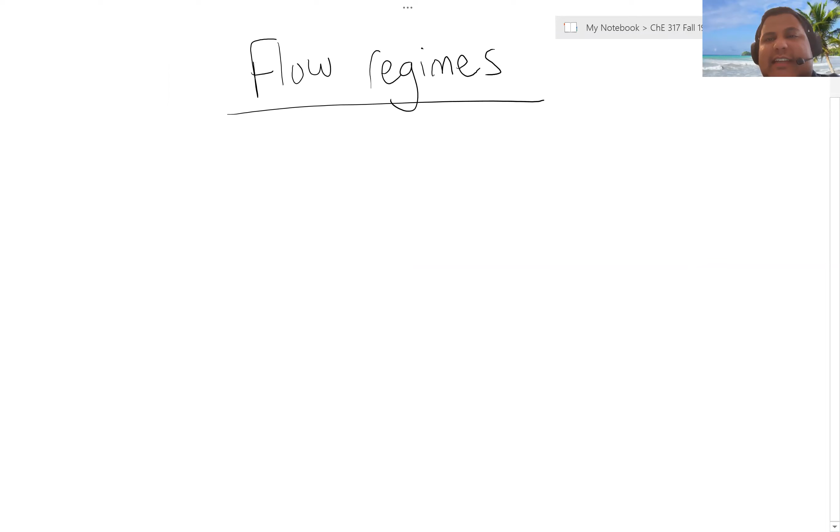Today, we're going to discuss topics associated with flow regimes and how the flow regime you operate under relates to turbulence and shear stress. When we're looking at flow regimes, we're looking at one of three categories, which describes, in general, the nature of the flow and how it relates to shear stress and, by extension, frictional dissipation. These regimes are laminar flow, transitional flow, and turbulent flow.

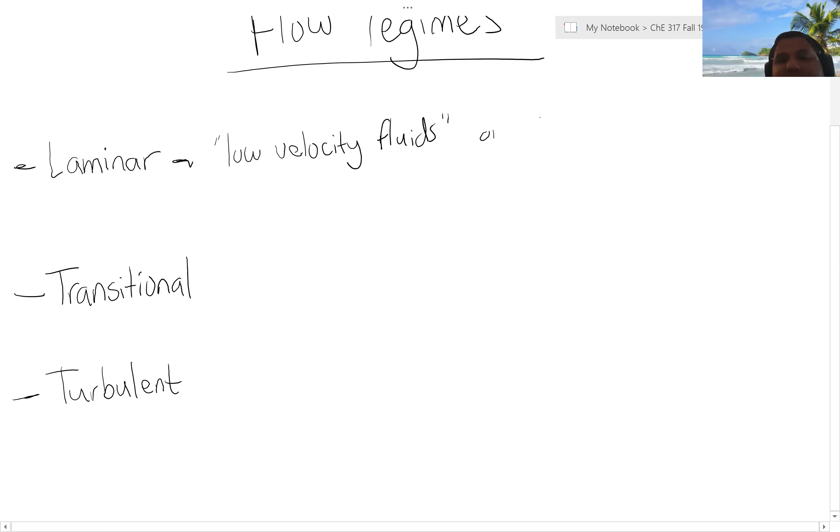When we're looking at laminar flow, we consider this flow regime for what's considered low velocity fluids, or fluids that can be considered highly viscous, with no lateral mixing. We can consider the fluid layers, i.e. the streamlines, exist independently.

You don't have to wear your mask. I don't think so. Not when you're sitting down.

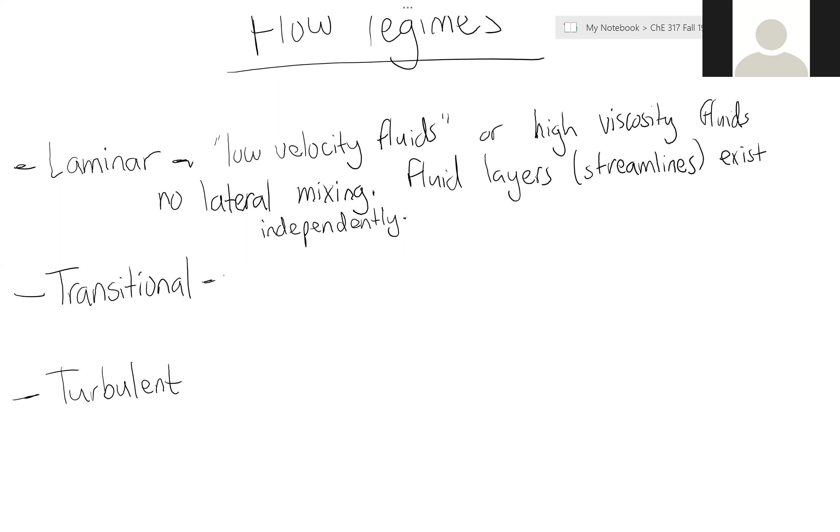And so when the velocity starts to increase, we start getting into a transitional flow regime where we start to see the presence of flow irregularities.

You'll get used to it. I mean, this is your day one by yourself, so. Guys, whoever is not mute, can you mute yourselves? I muted them, don't worry.

So we start to see the presence of flow irregularities, eddies, which results in slight lateral mixing of streamlines.

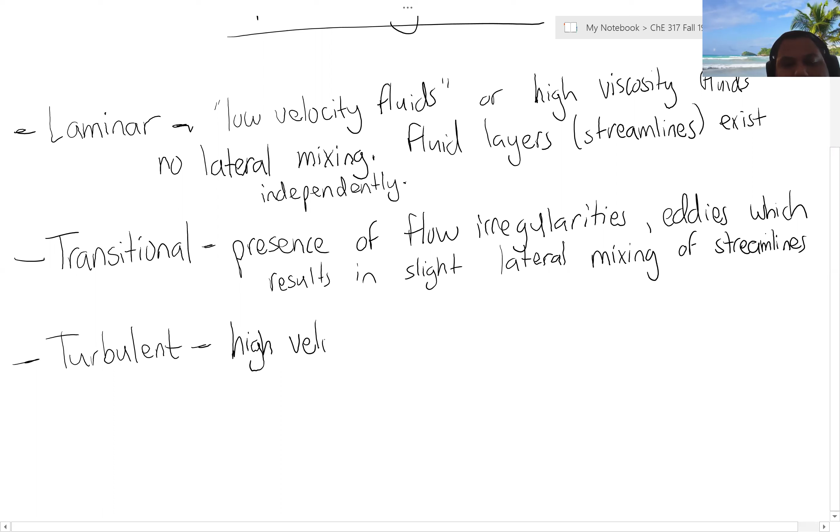And finally, we have turbulent flow, which we categorize as high velocity flow, and a big important thing to discuss here is that shear stress becomes a function of density and independent of fluid viscosity.

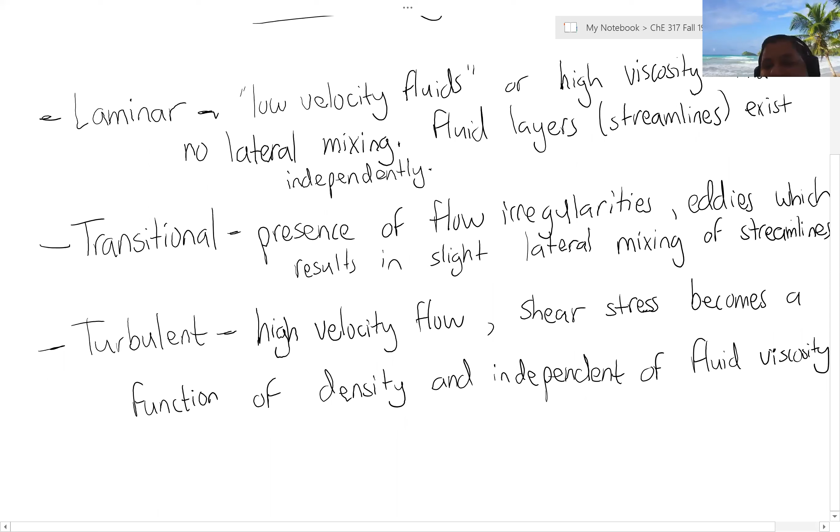So we have these three regimes going from low velocity to high velocity. We start in a laminar regime, then we encounter a transitional flow regime, and finally a turbulent flow regime. One other important thing to note in terms of laminar flow is that shear stress is a function of viscosity, and it's independent of fluid density. So that's a big delineation: as we compare and contrast laminar and turbulent flow, the shear stress becomes dependent on flow viscosity, independent of density. Then as we get into a turbulent regime, the dependence on viscosity drops away and the fluid density becomes an important parameter of the flow.

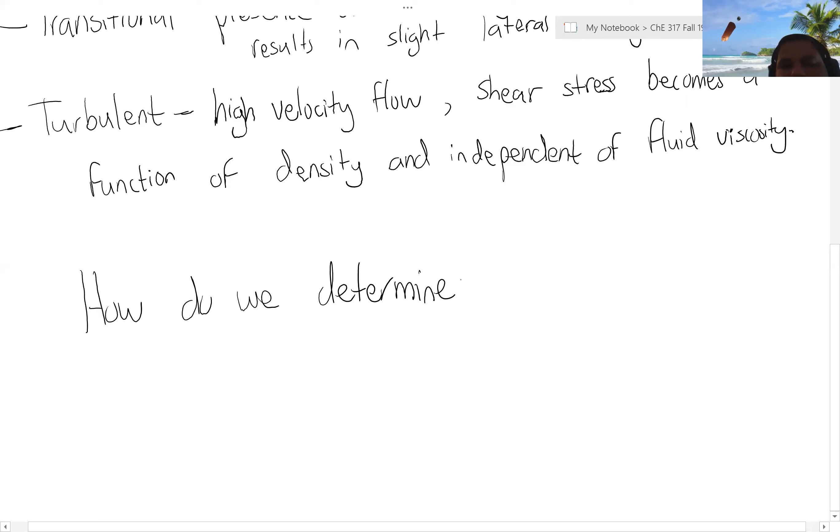So the next question then becomes, how do we characterize, or better word is determine, our current flow regime? So does anyone have any ideas on how we identify the current flow regime of operation?

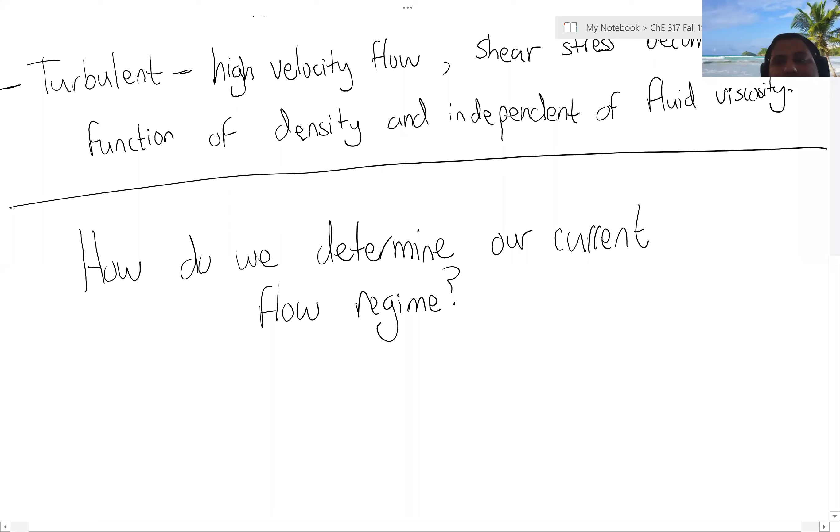You could take the Reynolds number of it. Okay, we can calculate a Reynolds number. There are a lot of ways we can define Reynolds. If we want to define it in terms of words, it's a ratio of flow convective forces over a fluid's viscous forces. So when viscosity is important relative to convection or flow, we have low Reynolds numbers, and as the convective forces begin to dominate and viscous forces become less important, we get into high Reynolds numbers.

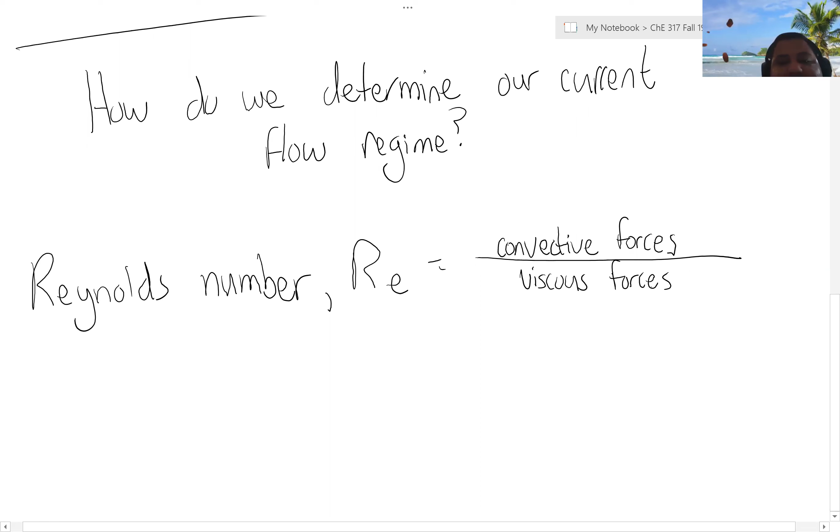So we can calculate it mathematically in one of several ways. The most common is fluid density times the fluid velocity, which I'll note by U, times the flow diameter dimension, which is the pipe diameter, over the fluid's absolute viscosity, mu. I can also write it as a function of fluid velocity times the pipe diameter over the kinematic viscosity, denoted by kappa. And I can also define it as a function of the pipe diameter times a term called G over absolute viscosity, where G is equal to the fluid density times the fluid velocity, known as a mass velocity.

And G becomes extremely important when we're talking about gases. So a lot of times when we're looking at gas and vapor flow and we want to calculate Reynolds number, this third way is how we do it.

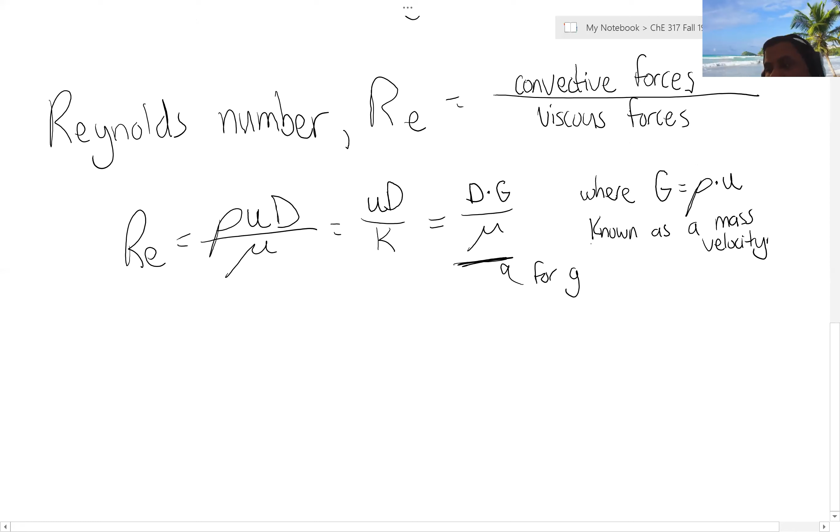So once we can calculate the Reynolds number, once we know it, we can categorize our flow regime based off of a series of values for laminar, transitional, and turbulent flow.

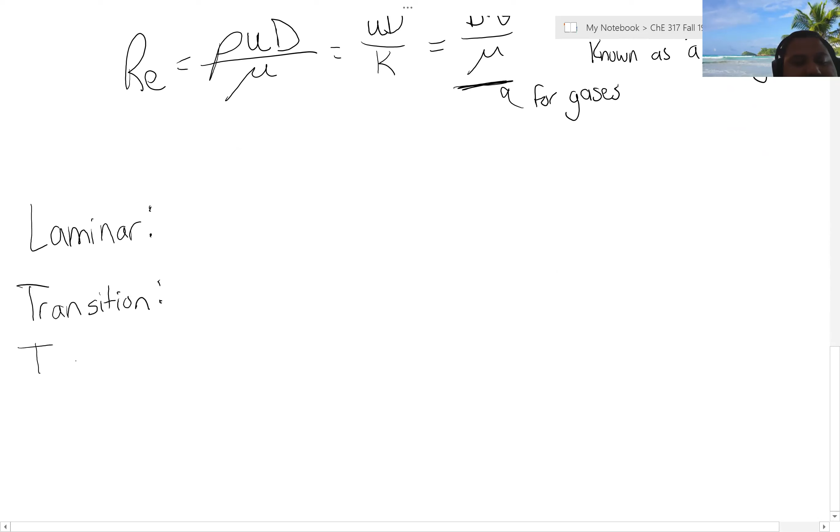So I saw in the chat a question about the third formula — when is it useful? This DG over mu is extremely useful for gases. We'll talk about why that's important in a little while. But if you're calculating Reynolds number for gases, you're more often than not going to use this third form of the calculation.

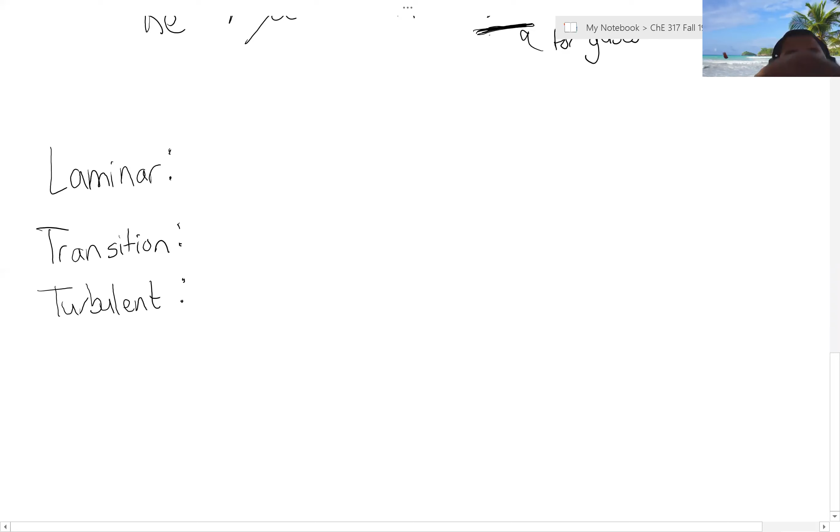So jumping back to laminar, transitional, and turbulent flow: we consider fluid to be in the laminar regime when the Reynolds number is below or equal to 2000. We consider the flow to be transitional when it's between 2000 and 4000. And we consider fluid flow to be turbulent when the Reynolds number is greater than 4000. Keeping in mind that these windows are approximations.

And they're not set in stone. So these values I give you are engineering ballparks so that you can make reasonable assumptions based on the data that you have.

So in terms of illustrating the nature of these flow regimes, I've got a good video that describes it pretty well, so I'll go ahead and share it with you all. I don't think we need the sound for it though. Hopefully you guys can see this video as it starts.

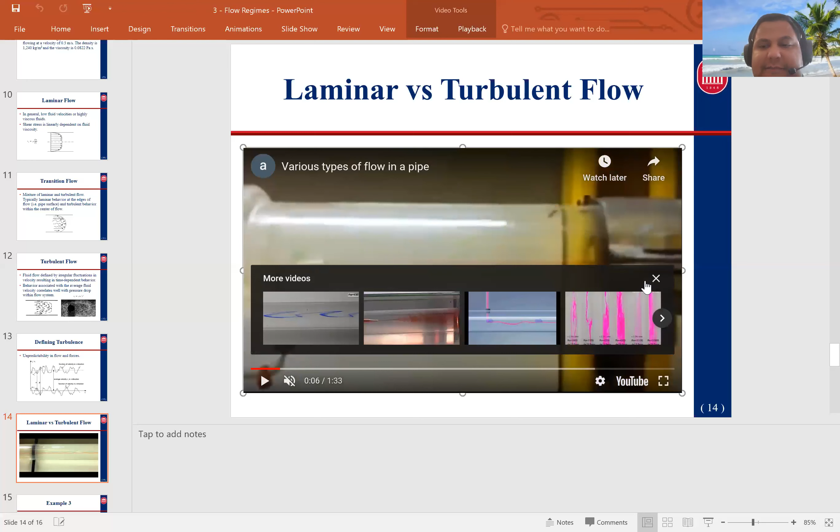So in this video, we've got a fluid streamline being illustrated by this red dyed fluid within this pipe of the same fluid, it's just not dyed. And what they're doing in this video is they're slowly increasing the velocity. So here initially we're in the laminar flow regime. That streamline exists pretty well defined. You notice that there's no lateral mixing.

However, as the flow velocity increases, you start to see the transition from laminar to a transitional flow regime. That's going to be evidenced by slight eddies and irregularities that form within that streamline. You start to kind of see the streamline moving up and down, or there's presence of small mixing occurring along that streamline. So at this point, we consider this to be transitional flow. That streamline is no longer as well defined as it once was.

And now as the flow velocity continues to increase, we're going to move from this transitional flow regime into a more fully turbulent flow regime. The biggest characteristic of this fully turbulent flow regime will be the disappearance of that streamline entirely. So as you can see, that flow velocity is increasing more and more, and the actual existence of that streamline and the visible evidence of that dye becomes more and more muddled to the point where you can only barely see it because the mixing rate is so high within the flow system.

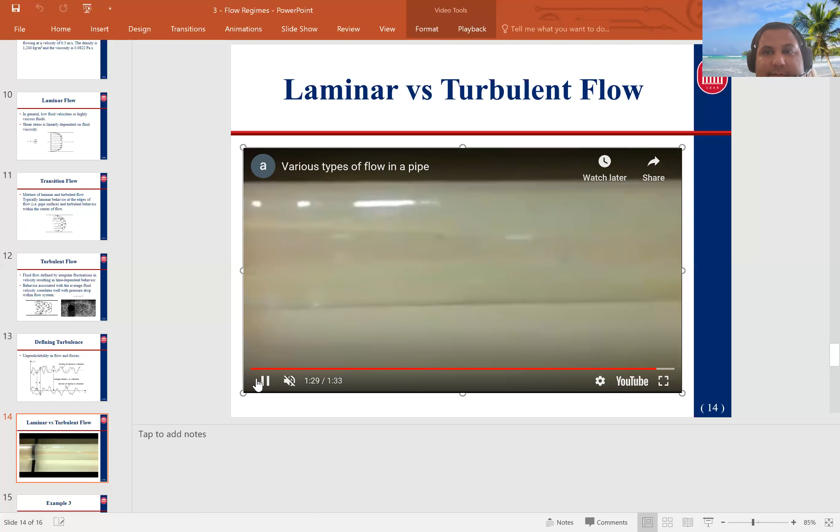Yes, Claire, did you have a question? Yeah, I did. So I remember... oh, I can't hear you, Claire. Let me see just a second. Okay, can you hear me? Can you hear me now? If you want, you can ask a question in the chat if you're having audio issues, and I'll be happy to repeat it for everybody in the class. We can hear you, so we can repeat the question. Anyone else have questions if you can't hear?

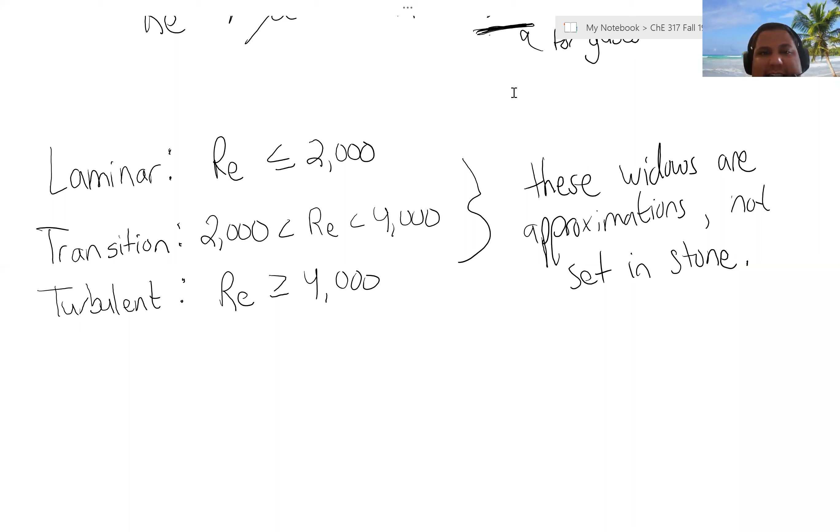No? Okay, so let's take a look at an example. I realized I should have left it on this PowerPoint just a little bit longer. So this one's not too bad. Get the brain working a little bit.

Let's calculate the Reynolds number of a fluid with a specific gravity of 0.9 traveling through a 3-inch pipe at a velocity of 1.2 feet per second, if the fluid viscosity is approximately 3.46 times 10 to the minus third pound mass per feet second.

So let's jump back over to our whiteboard and see if we can do this calculation. So we have Reynolds number, rho UD over mu.

I see your question, I'll answer it after this example. If I remember correctly, the fluid density was 0.9, or the specific gravity was 0.9. I'm going to assume the fluid is a liquid, which means the reference density is water, which has a density of 62.4 pound mass per cubic feet. The flow velocity was 1.2 feet. The diameter was 3 inches, or 3 over 12 feet. And the viscosity was 3.46 times 10 to the minus 3 pound mass per foot second.

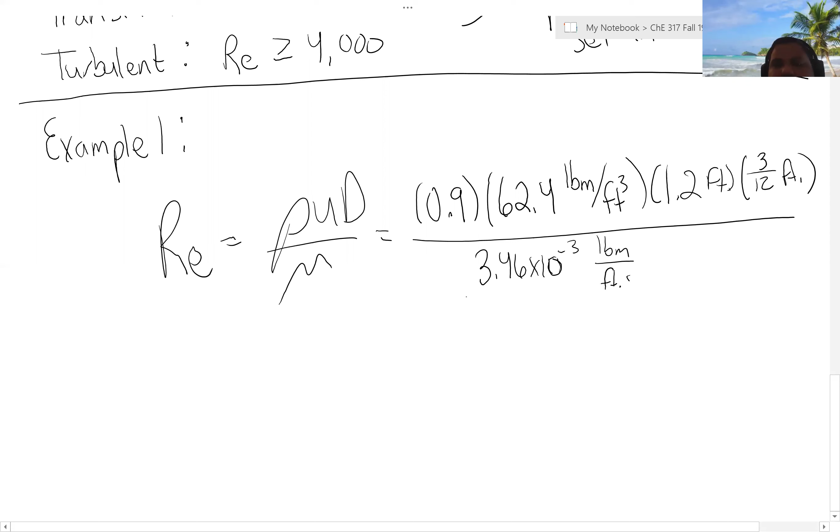If we do that calculation, we should get a Reynolds number of approximately 4,900, which implies that this is turbulent flow.

So in the chat, I had a question about the nature of turbulence, as well as the essential range for laminar, transitional, and turbulent flow. I think Claire mentioned that in a transport textbook, they define turbulent flow as having a Reynolds number greater than 10,000. Some texts will define that range over different areas for a number of reasons. The simplest, most straightforward reason as to why it would define it so high would mainly be the confidence of the assumption.

There could be many systems where you're operating more in a transitional sense between 4,000 and 10,000 Reynolds number versus turbulent, but the issue with transitional flow is the reliability of the assumptions and calculations you can make for estimating shear stress and frictional dissipation. So in the text, as we define it, we narrow that range for transitional flow primarily because there's no easy way to perform reliable calculations with that assumption.

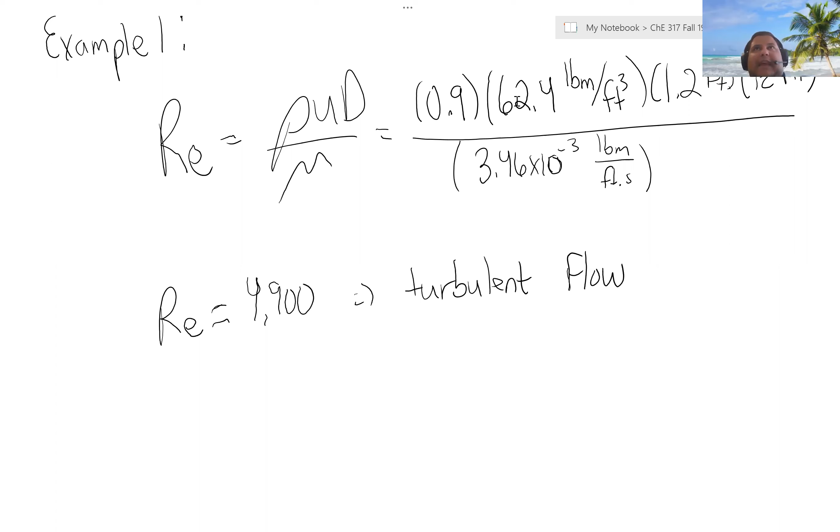So I give you these windows as ways to make judgment calls in this class, as well as when you go on, keeping in mind that big asterisk—it's really more important to understand the nature of these flow regimes, how they occur, and how you can characterize them in terms of flow properties.

Does that clear things up a little bit? If so, let's jump forward a little bit.

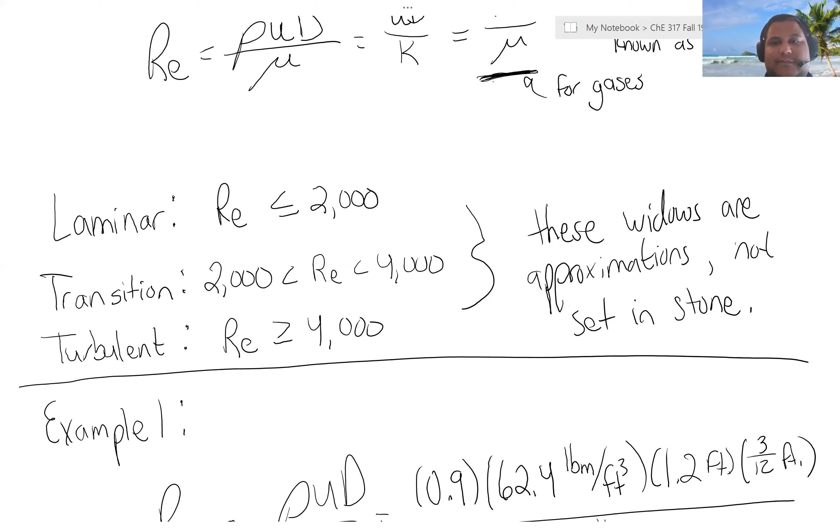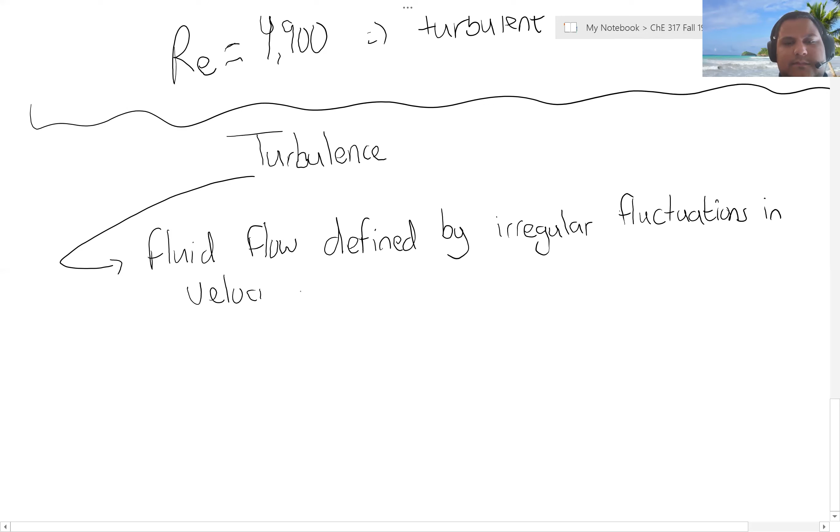We'll talk about the implications of these flow regimes as they relate to turbulence. When we're talking about turbulence, we're really looking at fluid flow defined by irregular fluctuations in velocity, and I mean that in both the sense of the magnitude of the flow velocity as well as the direction of flow velocity.

So visualizing turbulence, what we typically see if we're following a fluid particle along a flow through a pipe in a single direction is that while there might be an average we can use, and for the most part when we do calculations we operate based off some arithmetic mean, in actuality that fluid has a highly irregular flow, which results in mixing, eddies, vortices, as well as the shear we experience during flow.

One of the issues that arises a lot is, as I said, we can't really describe a reasonable function that can model or predict this behavior. So the best thing we can do is operate off a series of averaged values and develop either empirical models or analytical solutions to describe what to expect within these flow systems.

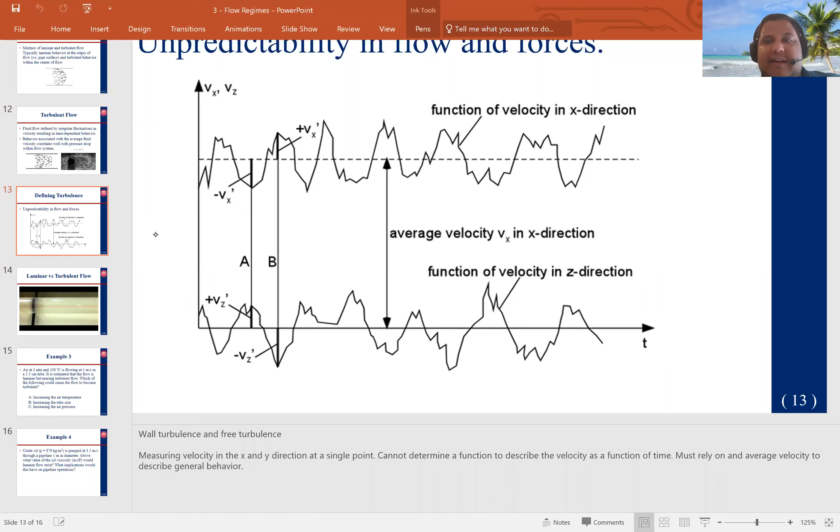The definitions of our flow regimes is one of the most fundamental ways we can make assumptions about how to describe fluid flow as it occurs and how it changes as a function of several properties, both intrinsic and extrinsic in nature.

One of the reasons this turbulence exists, and results in a lot of issues, is as a function of the presence of boundary layers.

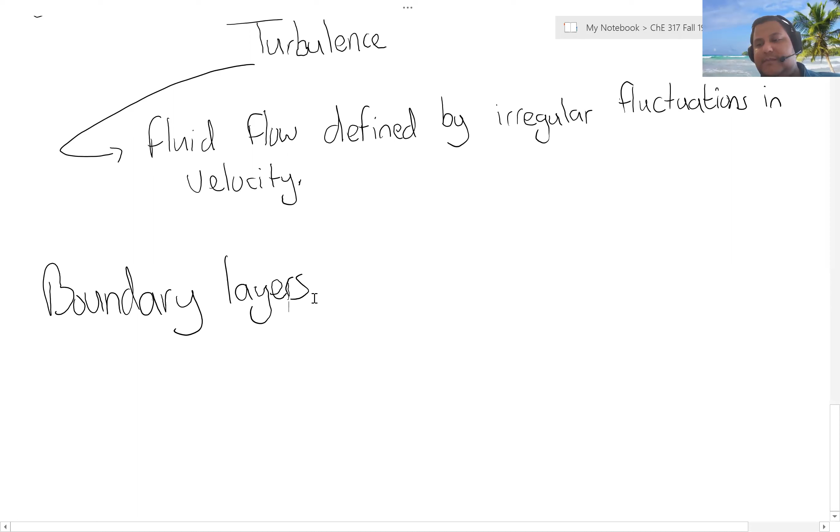We're going to talk about boundary layers, not a ton. However, it's important that we touch base on it when it comes to a few things, definitely as it relates to turbulence. What I mean by boundary layers is I'm looking at a solid-fluid interface that interacts with a moving fluid.

I think I had one other question show up in the chat. Let me take a look. Oh, that gap was just a space for organizational purposes. I'll take another look later and we can talk in office hours, but you don't need to worry about that.

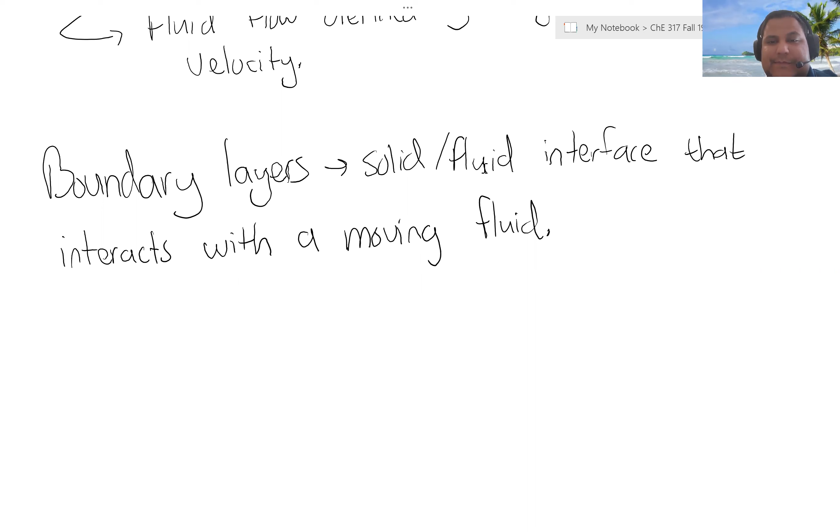So let's look at boundary layers, how they form, and how they contribute to fluid flow as it relates to shear and turbulence. If I have a pipe wall here, and I have fluid entering this system, one of the things that's going to happen along this pipe wall is the fluid is going to interact with the solid interface, such that the fluid directly touching that solid interface operates under a condition where the velocity is 0. This is called the no-slip condition.

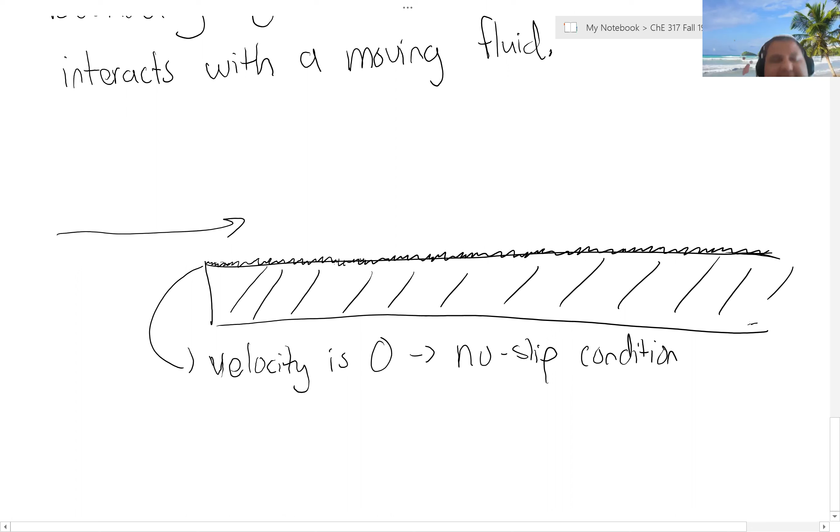And it's a function of adhesion forces between the fluid and the solid surface. And so we consider that to the point where the fluid essentially does not move at that direct interface. Now, if we move just a little bit above that interface, we're going to have fluid that sits above that boundary where the no slip occurs.

And so if the velocity is 0 right at the fluid solid interface, what do you expect the velocity to be close to that interface? Is it going to be large or is it going to be small? It should be small.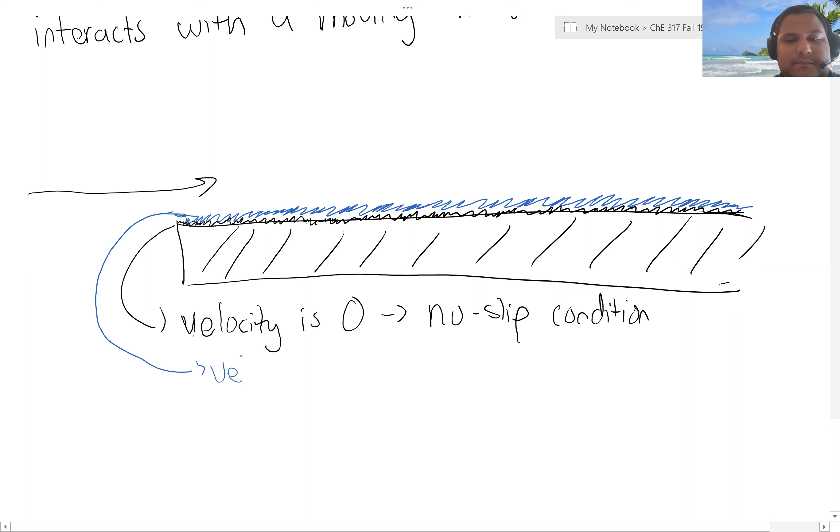I agree, it should be small. Any ideas? Anyone want to take a guess? I got somebody in the chat. So I've got, it would be a low velocity, and you are correct. So if the velocity here, what flow regime would we expect to see very close to our solid fluid interface?

All right, so I got something in the chat that says my speakers aren't working. So can you guys hear me okay? Yes, we can. Can you guys try talking now? Can you hear us, Dr. Lopez? You guys can hear each other, but I can't hear you, is that what you're saying? Yeah. Interesting, that's a new one. You guys there? Yeah, can you hear us? I can hear you now. Apparently when I muted my computer, it muted my headphones. So I apologize for that. Now I can hear you. All right. It happens. Okay. All right, let's jump back in. Thank you guys, and I apologize for the minor inconvenience.

So the velocity is really small, close to that interface. So what can we assume in terms of the flow regime that's going to operate really close to the pipe wall fluid interface? Laminar flow. So we're going to have laminar flow at that close to the interface. And that's independent of the actual bulk fluid flow.

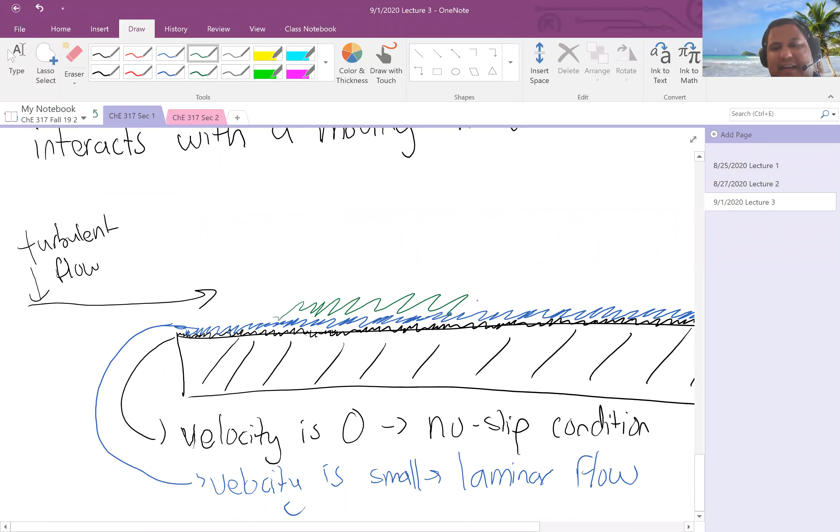It doesn't matter how fast the fluid's flowing. Close to the solid fluid interface, we have laminar flow, which means if we've got turbulent flow, if I'm going to just assume this is turbulent flow, I have some degree of laminar flow at the edge, which means eventually I'm going to have some degree of the velocity starting to increase, get closer and closer to the bulk. Velocity is smallish.

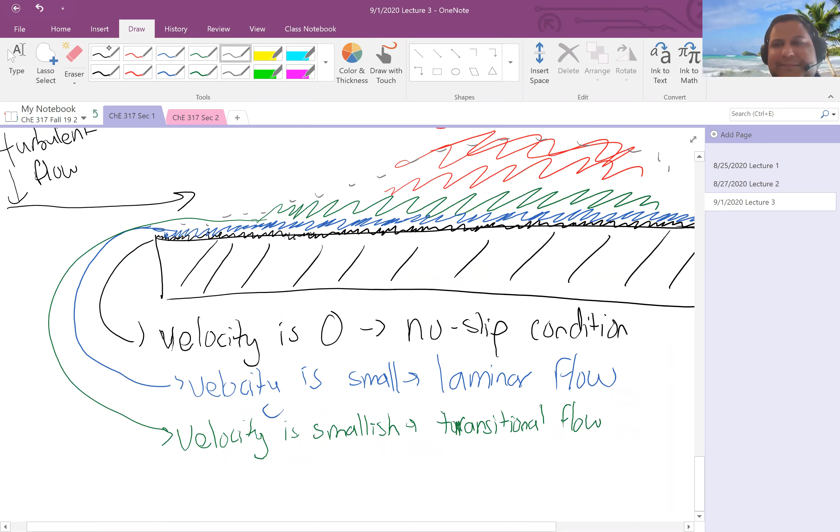And so I have turbulent transitional flow. And then eventually, I can have what I might see in the bulk, where this is going to be my bulk turbulent flow. And yes, I know this isn't the world's best artwork. Which means I have the existence of a boundary layer that emerges as fluid flows through and around solid objects.

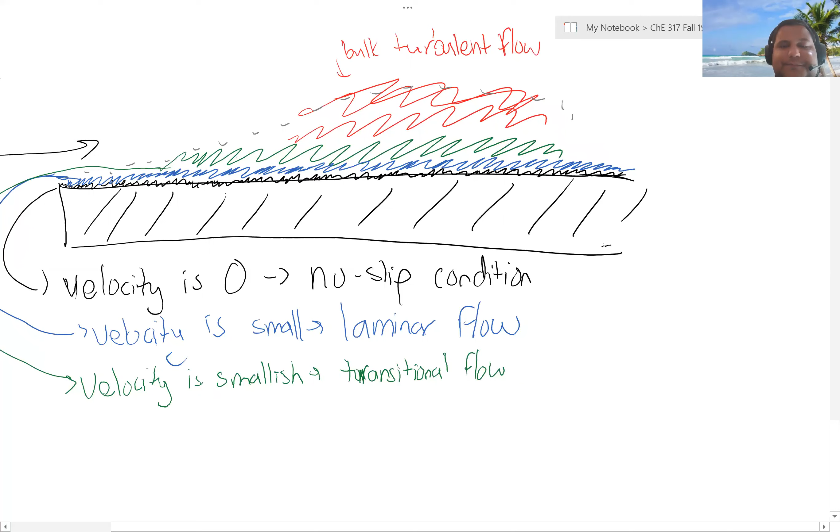So if I have flow through a pipe, which is what we deal with like 80% of the time, we're going to have these several boundary layers that emerge, where we have this laminar boundary layer. It's also called a viscous boundary layer. Then we have this transitional boundary layer, which is also known as a buffer layer in your text. And then you have this fully turbulent boundary layer, which is considered part of the boundary layer primarily because it interacts with the other two boundary layers.

And so, independent of what the actual average flow regime we have, we still have the existence of all three flow regimes along the surface as a function of the interactions that occur with the solid and the fluid interface, right? So we have the sticky interface that results in this no-slip condition. And as a result of that, we have viscous flow very close to the solid fluid interface.

Then as we move away from the solid fluid interface, we have more indicative flow of what you would expect of the bulk flow, which means the flow regime's changing as a function of this y direction, even though fluid is flowing in the x direction. And so what this means is we have a lot of different flow regimes at varying velocities, all within the pipe system or the flow system.

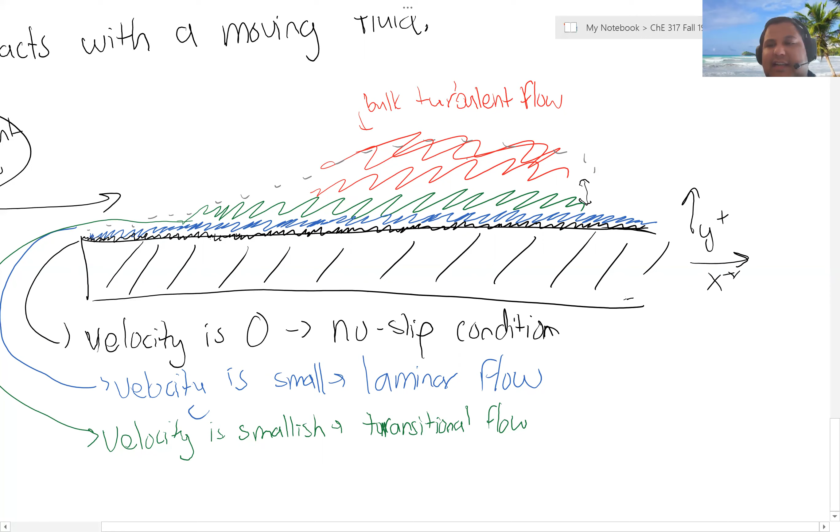And this results in a lot, especially in a buffer layer, we have a lot of mixing, but at the same time, close to the solid fluid interface, that means we have a lot of shear happening due to the viscous flow that's occurring.

And so if we're gonna look at flow through a pipe and we wanna categorize shear, these are my two pipe walls, I know they're thick pipe. It's all Home Depot had today.

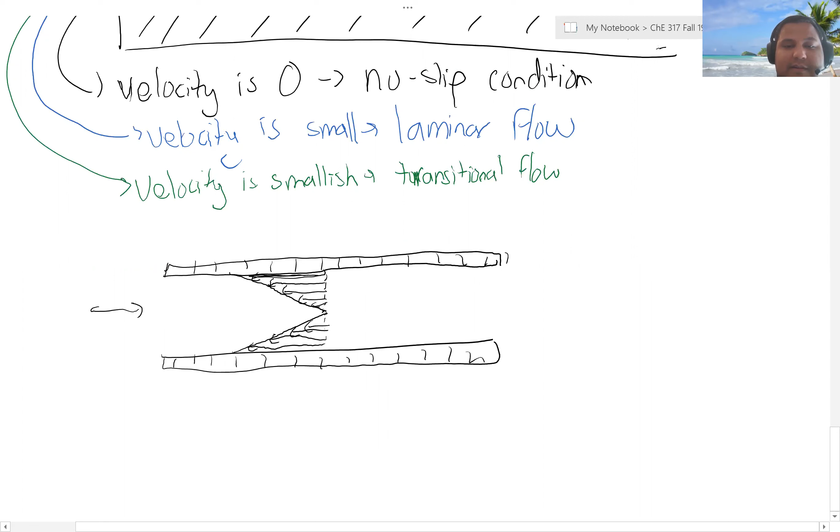If I wanted to categorize the magnitude of shear: if this is the direction of flow, shear resists that flow, so it goes in the opposite direction. The maximum shear stress within our fluid flow is at that solid-fluid interface, as a function of the no-slip condition and the viscous flow that happens very close to it. Then as we move to the center line, our shear diminishes.

At the same time, if we look at shear and velocity, we have a minimum velocity at the surface—we have a no-slip condition—and we have a maximum velocity at the center line of our flow.

The actual nature of the curve, I'll draw it like a parabola, is largely dependent on the bulk flow regime. So the bulk flow regime determines u of y—velocity as a function of your placement along the y coordinate. If we're looking at a laminar flow regime, you're going to have something that's very parabolic.

If you're going to have a turbulent flow regime—so this would be more indicative of laminar flow. If you're looking at turbulent flow, I'll draw it to the right here, even though it's probably not going to help you much—you have something that looks a little more flattened out.

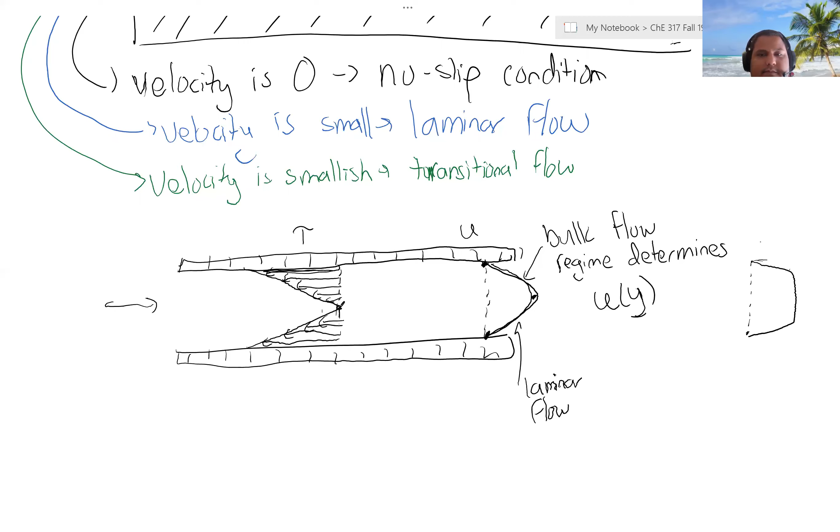You can kind of tell that this variation from the mean shows you where the existence of that boundary layer is. Which means in general, the lower the velocity, the greater the effective boundary layer penetration depth. But that's not super important right now. The important thing I want you to get is the no-slip condition and how it leads to the formation and existence of these boundary layers—the laminar boundary layer, the transitional boundary layer, and the turbulent boundary layer.

I have a question. Yes, sir. You said that the turbulent flow has all three—does the laminar flow have turbulent flow inside of it?

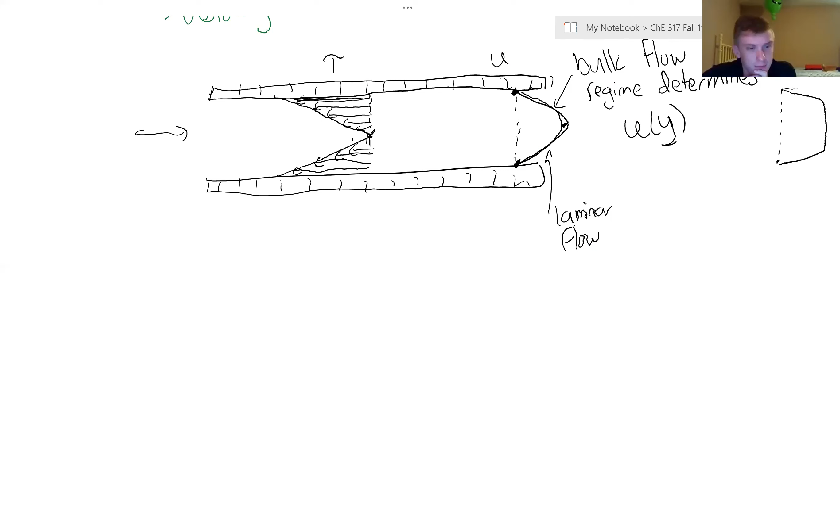If you're looking at truly laminar flow, you're not going to have turbulent flow boundary layers—no. It's only when the velocity is sufficiently high. If the bulk velocity is so low that the flow is largely considered laminar, you're really only going to have laminar boundary layers. Okay, thank you. You're welcome, that's a good question.

So a couple things to calculate from this. One is—let me see what I calculated—the distance to transition from laminar to a turbulent flow in the boundary layer.

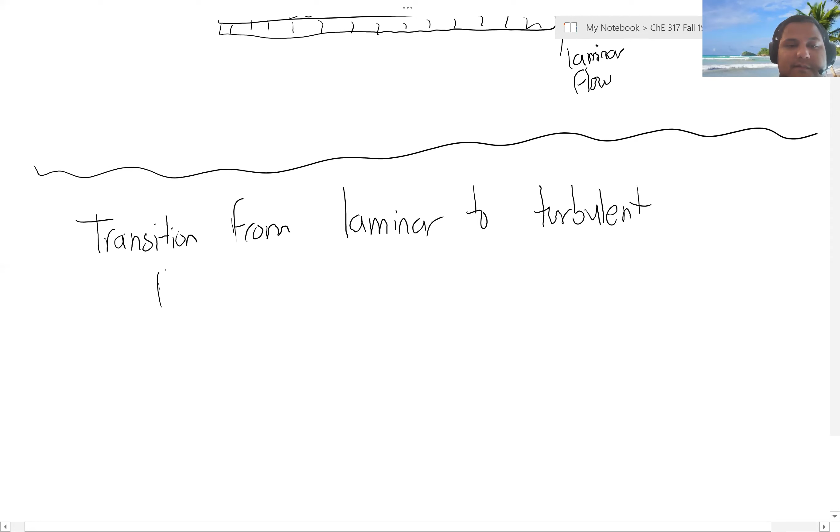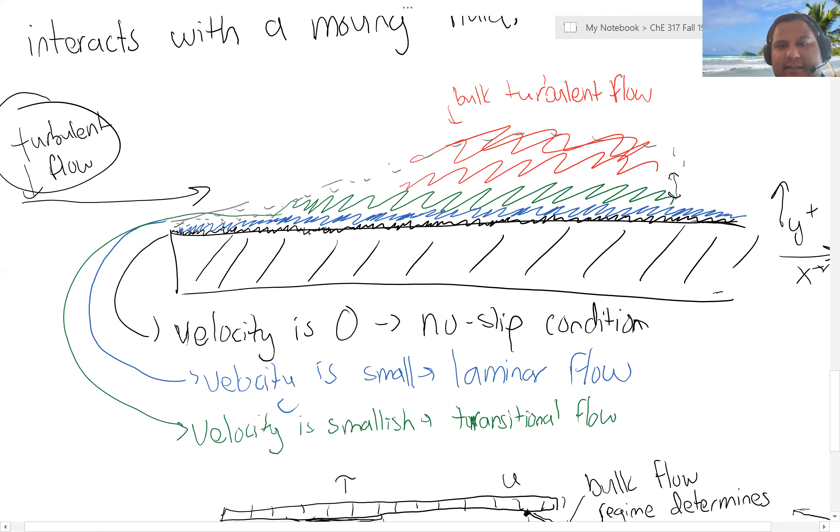What that means is if we're looking at this formation of the boundary layers, I drew this intentionally because the boundary layer emerges along this gray line—it's a little hard to see, so I'll color it in. There's a distance, which we can denote as x, where the boundary layers that are formed are largely laminar in nature with some transitional. Once you start to see the formation of turbulent flow in that boundary layer, we characterize it by this transition length, where we can say the boundary layers are considered fully developed.

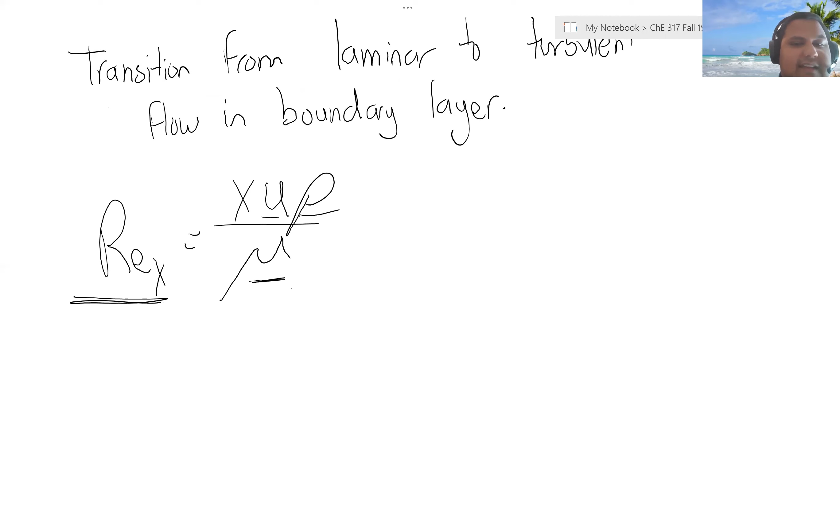And so we quantify it by this expression. We have the Reynolds number of our fluid flow, the flow velocity, flow density, and flow viscosity. X is that transition length in terms of when the boundary layer is considered fully developed.

Another transition length—and I know they're confusing because they're both kind of transition lengths—is the entrance length, where the boundary layer, or the influence of the boundary layer, reaches the center line.

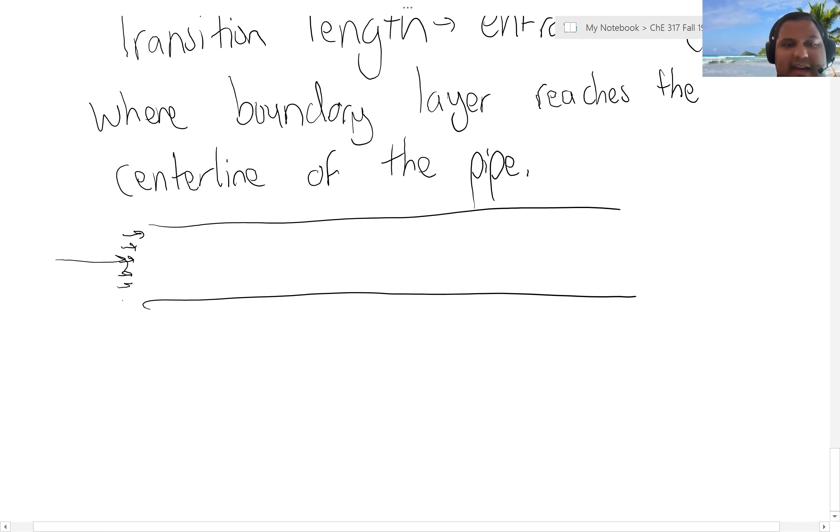Which means, to describe this: if I've got flow through a pipe, when I'm looking right at the entrance of a pipe, my flow will have the same mean velocity as a function of that y coordinate. But as I enter, I'm going to start to see the boundary layers start to form within my flow system.

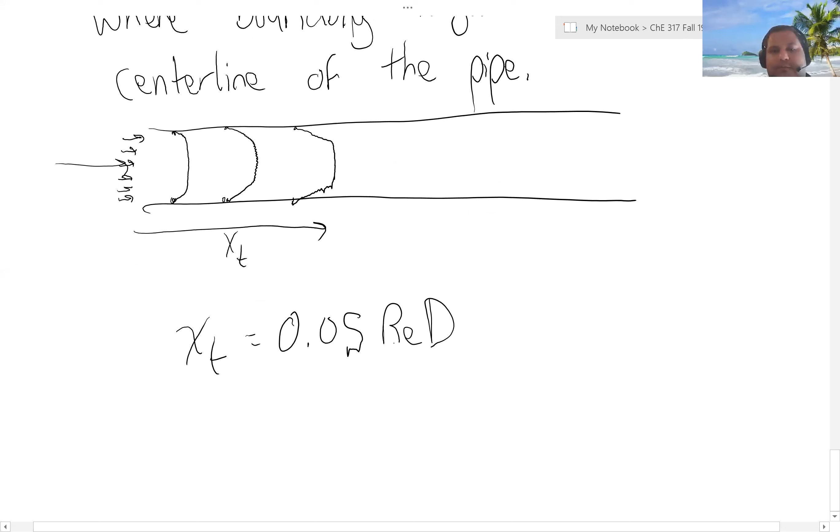Essentially the distance, or the transition length for that velocity profile to fully develop, is going to be characterized by a second transition length, which is 0.05 times my Reynolds number times my pipe diameter. I'd argue this one's more important than the other transition length, primarily because we're going to see this one again when we look at heat transfer later on in the semester.

So let's look at an example of this, where I can say: estimate the transition length at the entrance to a 15 millimeter tube where glycerol at 60 degrees is flowing at a velocity of about 0.5 meters per second. The density is 1,240 kilograms per cubic meter, and the viscosity is approximately 0.0822 Pascal seconds. I'll give you all a second to write that down.

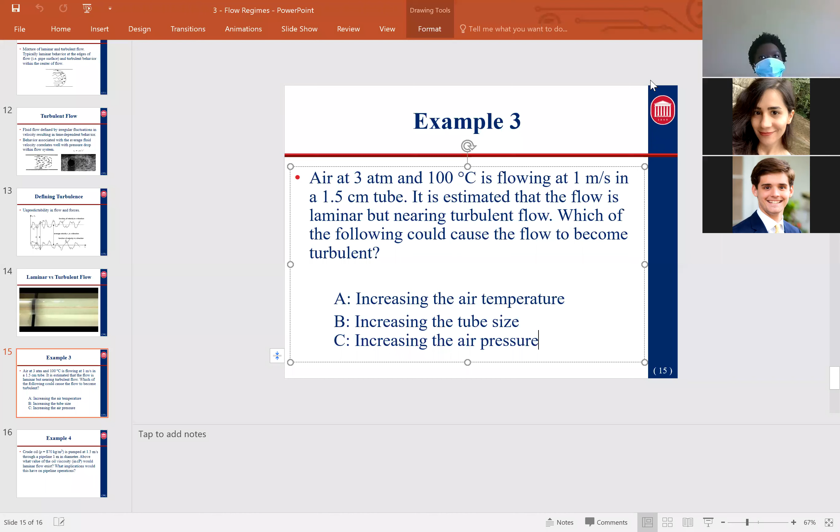All right, I got some papers in the house. Confident rock, I got a pen - not sure what pen means. And then I got ghosts from anybody else. I have this problem where I don't see dead people, I just see names in black. All right, the answer, I got 2 people from the chat. Paper, I like it, everybody's a fan of paper. The correct answer is it depends. I know, everybody's favorite answer. Jacob's over there about to throw his computer at me.

So let's take a look at this one. If I'm going to go from a laminar regime to a turbulent regime in a gas, do I increase the temperature, the pipe diameter, or the pressure? Well, if I increase the temperature - since it's a gas, and I know Reynolds number, and we're not going to talk about mass velocity for much - increasing the temperature is going to increase the viscosity, which means that's going to make it less turbulent. However, if I'm increasing the temperature, knowing that density is a function of temperature as well, my density is going to decrease as well.

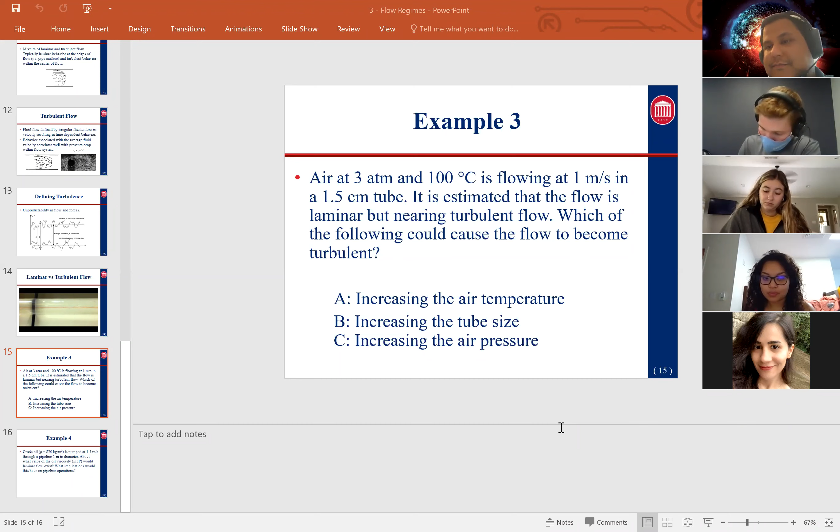And then the last one would be pressure. Increasing the pressure would, by the same ideal gas assumption, increase the density. It's not going to change the velocity, diameter, or viscosity. So that would increase the Reynolds number and move us into a more turbulent regime. I'd say this is like a 3/4 check, and pressure would be a full check. So there you go, the answer is it's not as simple as paper, scissors, rock - as much as we would like to assume all of life's greatest mysteries can be answered with just paper, scissors, rock.

So any questions over our discussion of flow regimes?

All right, that means we're ready to move into some of my more favorite topics in fluid mechanics: mass and energy balances in fluid mechanics. I like them so much, I'll draw a really creepy smiley face.

So, everybody's favorite, mass balances. We can describe a lot of really complicated math, which we'll get to in a second, but it all boils down to a very simple life lesson: garbage in equals garbage out.

So the question then becomes, how does this apply to fluid flow? I was on the early one, but I can't see the notes, it's still on the PowerPoint for me. Oh, it's still on the PowerPoint for you? Okay, thank you for letting me know. All right, so you missed out on my fun smiley face. There it is.

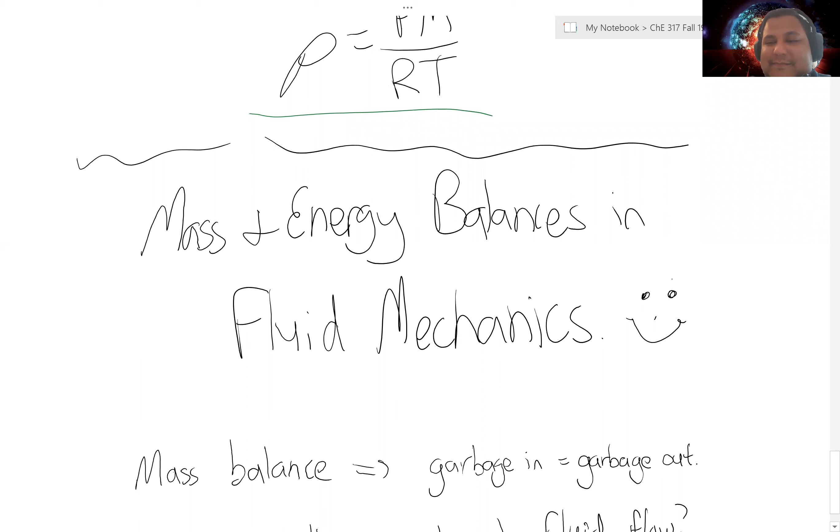So looking at mass balances, we'll probably do energy balances on Thursday. So how can we apply this to fluid flow? Well, let's say I've got a cube, which I will attempt to draw and have it not look terrible. So I've got fluid, and I'm looking at just one section of this fluid in terms of it being a cube.

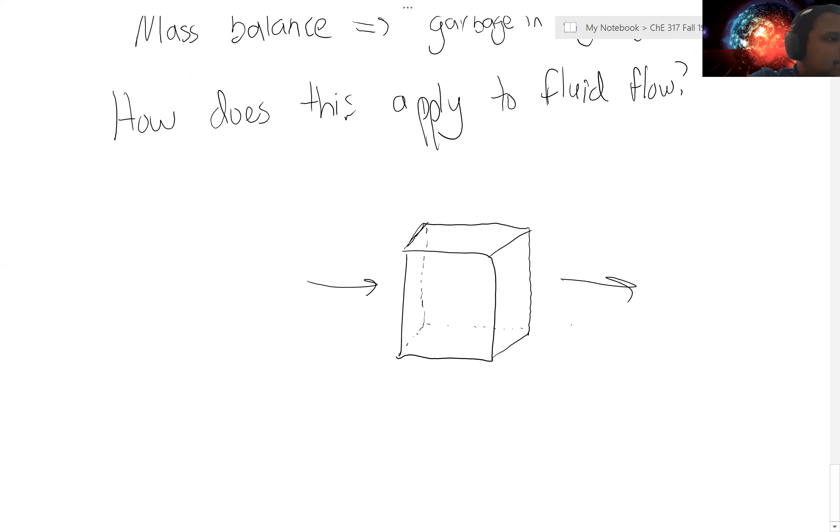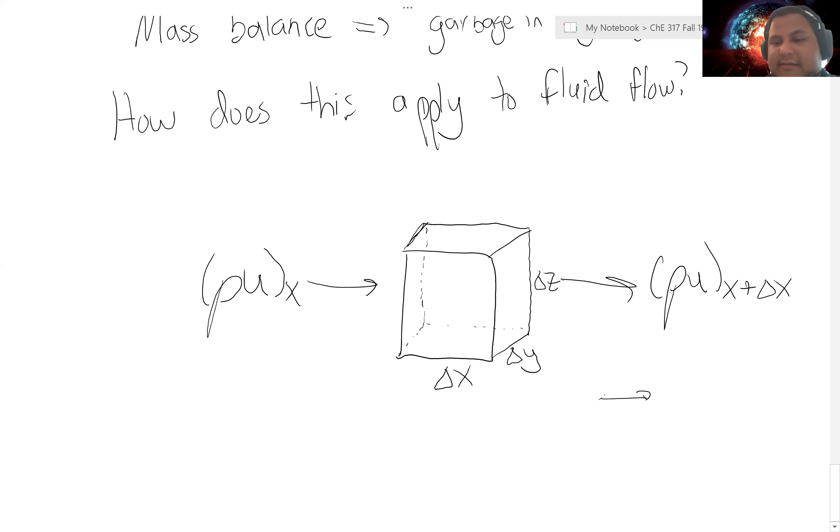So I've got mass coming in, and I have mass coming out of this cube. That mass can be characterized in terms of flow density and a flow velocity in the x direction. This cube is a delta on each side - I have a delta y here, delta z here, I've got x, y, z. I can categorize the flow where I've got flow going in, flow going out. Now I can do this for every coordinate on this cube.

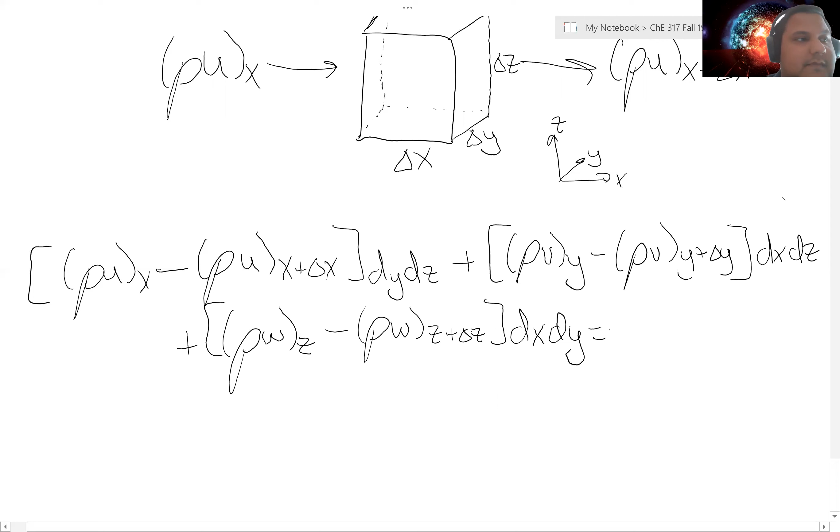Meaning if I wanted to fully describe the mass flux through this cube, the equation would look like this. I would have rho u x minus rho u, x plus delta x, dy dz, plus rho v, y, and I'm using v for a very important reason - y plus delta y, because I can't say that it's the same flux going in the x and y direction, dx dz, plus rho w, z, minus rho w, z plus delta z, dx dy, equals delta x, delta y, delta z, dp, dt.

Excuse me, this is d rho dt. Got to make sure my pressures and densities... So this quantifies my mass flux in all the x, y, z directions over a differential volume element.

Now, who wants to solve this? Claire, it's d rho dt, not dp dt.

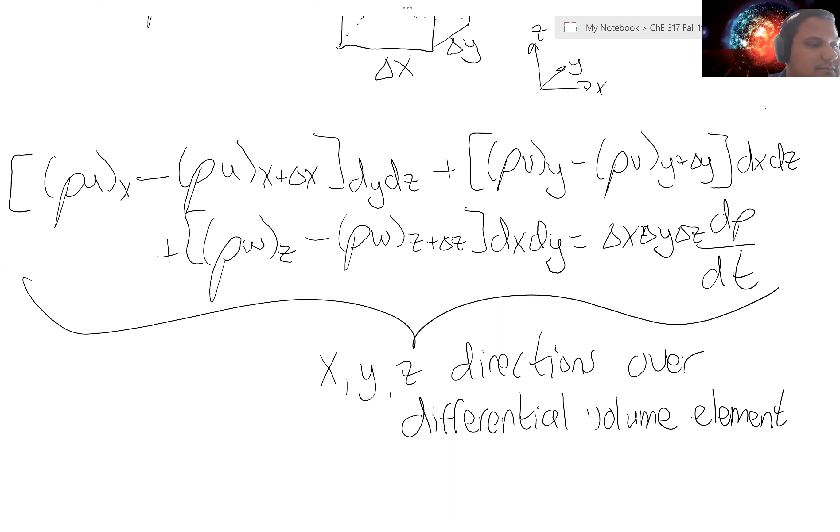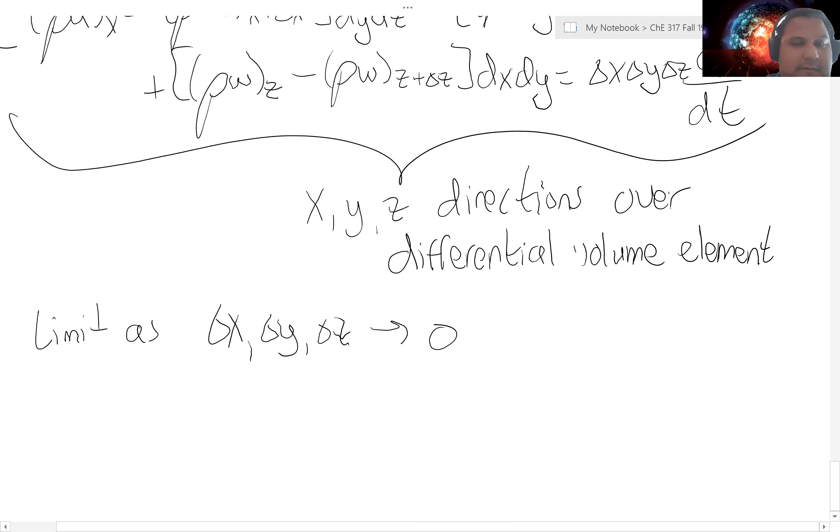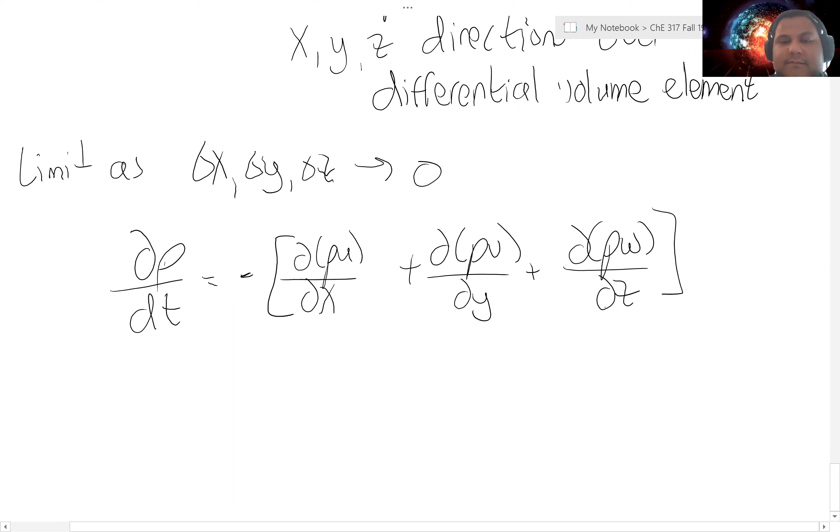So the good news is I can summarize this differential expression by taking the limit as delta x, delta y, and delta z approaches 0. And what I'm left with is a more straightforward expression: d rho dt equals negative d(rho u)/del x, plus del(rho v)/del y, plus del(rho w)/del z, which can be summarized by a fancy math operator known as the gradient, times rho v. And for those who like to know, this is equation 4.3. So a partial derivative of density with respect to time is equated to the gradient function of the density over the volume element that we analyze.

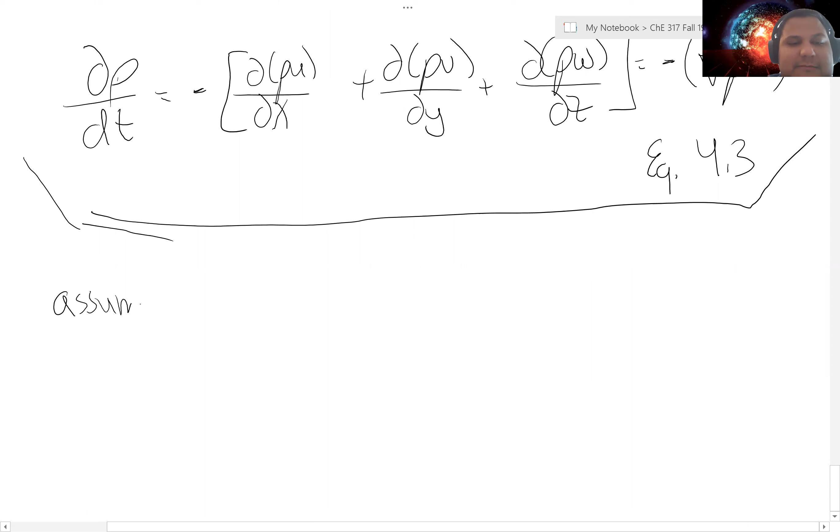All right, I will do Elijah, thank you. So while pretty and mathematical, this isn't going to be super helpful for us, which means we can make some assumptions. One of the most powerful assumptions that we'll make for most of this is that we're going to assume one-dimensional flow.

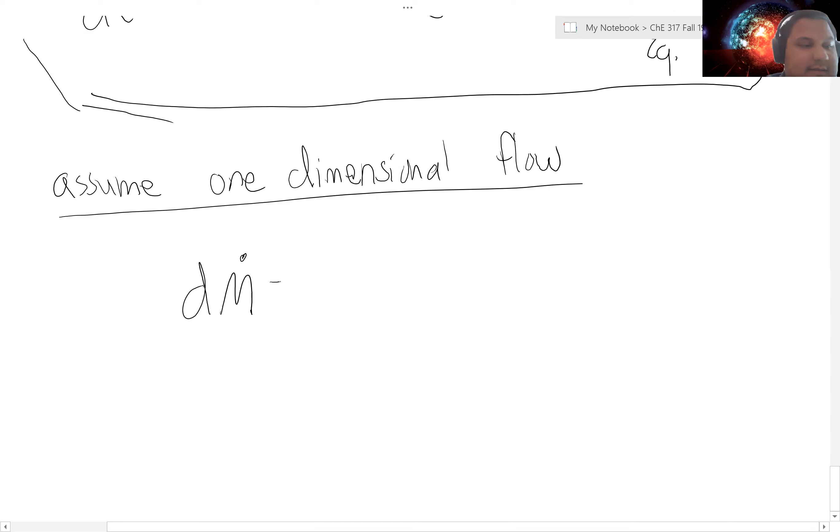Doing this allows us to drop out two of those three coordinates. And we're left with something a lot simpler, where we have dm dot equals rho u dS, which is simply the differential mass flow rate as a function of the fluid density, the flow velocity, and the differential cross-sectional area.

So if we integrate this from 0 to s, actually, you know what, I'm going to do something that makes way more sense because this book is silly. 0 to A. I'm going to call it cross-sectional area A, because area starts with the letter A, and that makes way more sense to me. So we're left with m dot is equal to rho U A.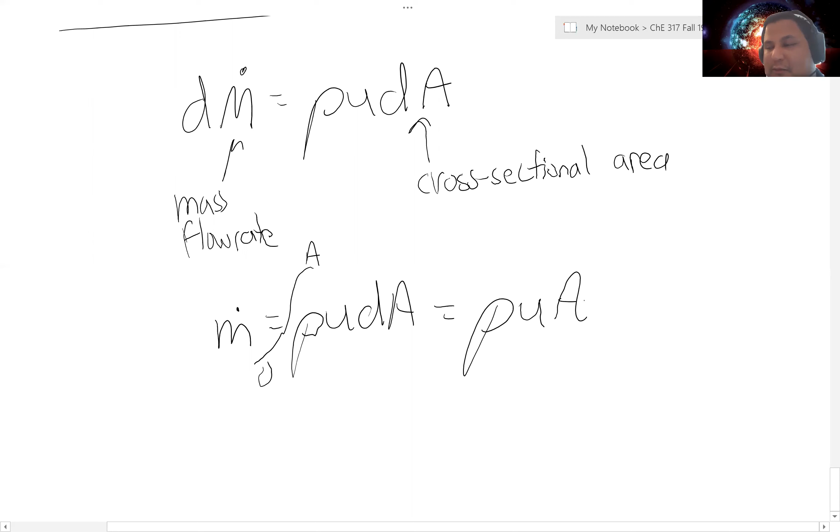And more importantly for us, I would state M1, rho 1... all right, let me take a step back because I don't want to confuse anybody. So we have this expression, M equals rho U A, which means if we're looking at flow through a pipe, and I have some mass flowing in here and some mass flowing out here, and I wanted to take a mass balance of the flow through a pipe, what expression would I get?

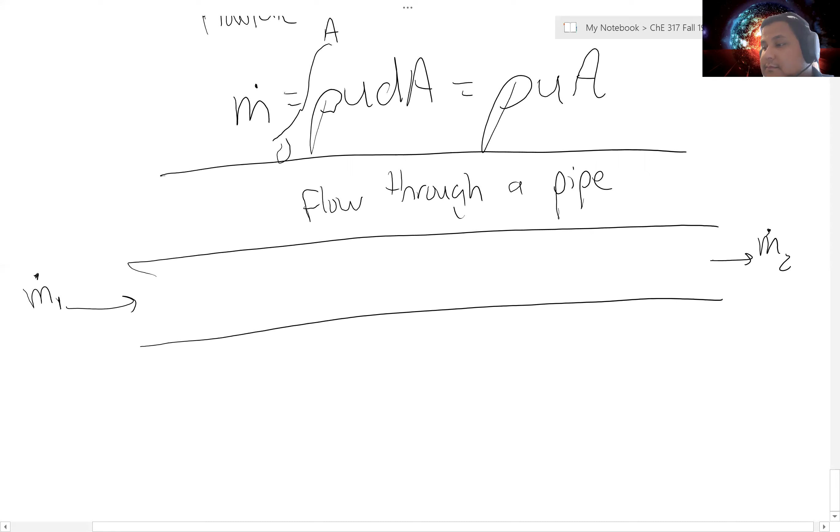Just in terms of these mass flow rate variables, M1 and M2. Would it be that M1 equals M2? Is that what you're asking? Yes. So I would get M1 is equal to M2, or garbage in is equal to garbage out. I know we had to do a lot of calculus and differential equations to get where we started. That's how math works.

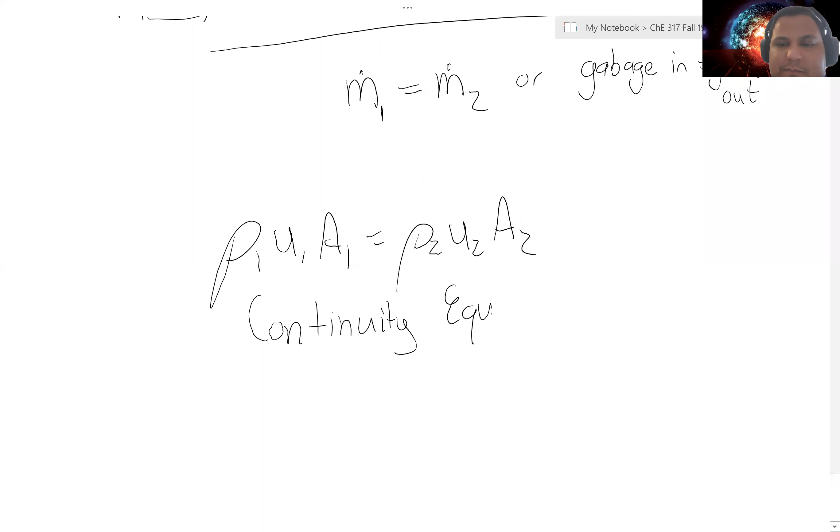Which means, based on the expression I derived, rho 1, U1, A1 is equal to rho 2, U2 times A2. Now this is a very important equation. I repeat, this is a very important equation. So much that we give it a name. Not only do we give it a name, we give it all the fanfare that we can imagine. I don't know what else I can do to let you know this is important, so I'm going to give you all the colors, I'll even give you a highlighter. So if you were going to have an equation sheet, this would probably be an equation I would put on it.

So if we're going to describe flow through a pipe, one of the important principles in terms of this mass balance is understanding the implications for the continuity equation and applying it as it relates to flow systems. What do I mean? Let's take a look at an example.

Oh, hold on, I have to open up the PowerPoint. Because this class is so advanced, we're looking at two PowerPoints in one day.

So let's look at this system. Say your friends over in civil did such a bang up job in their internship that they somehow managed to make a pipe with a decreasing diameter over the length of that pipe. Makes a lot of sense if you know some of those people. So how would velocity change as the fluid moves along the pipe? And how would the flow rate?

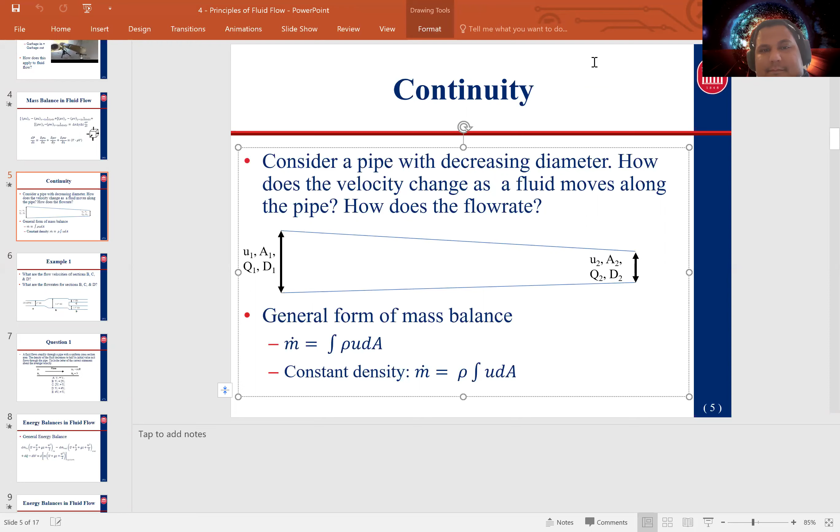So let's jump back to our notes. So example 1, civil engineers... that's all I need to say, right? That's usually how they spell it too.

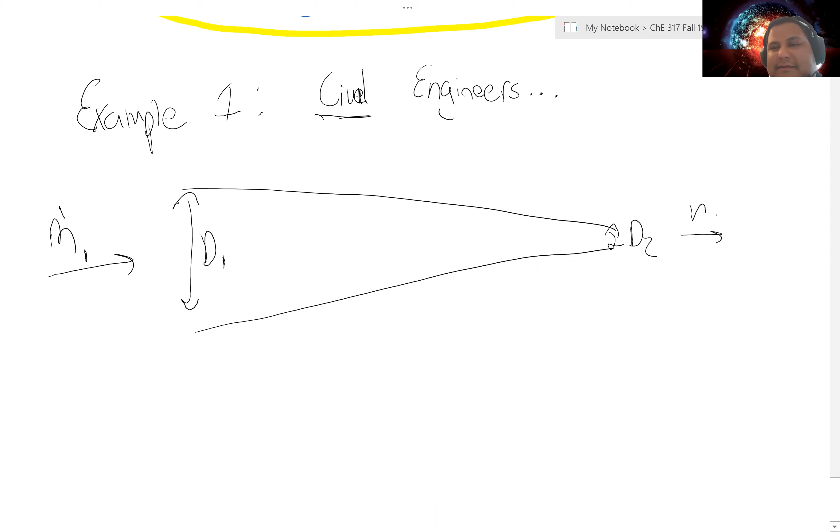All right, so we got flow through a pipe. We've got diameter 1, flow through a pipe, diameter 2. And I've got some mass flowing in, and I've got some mass flowing out. So what can we say about the flow rate? Let's start there.

Is M1 equal to, greater than, or less than M2? It equals M2. So M1 is going to equal M2. Okay, that's great.

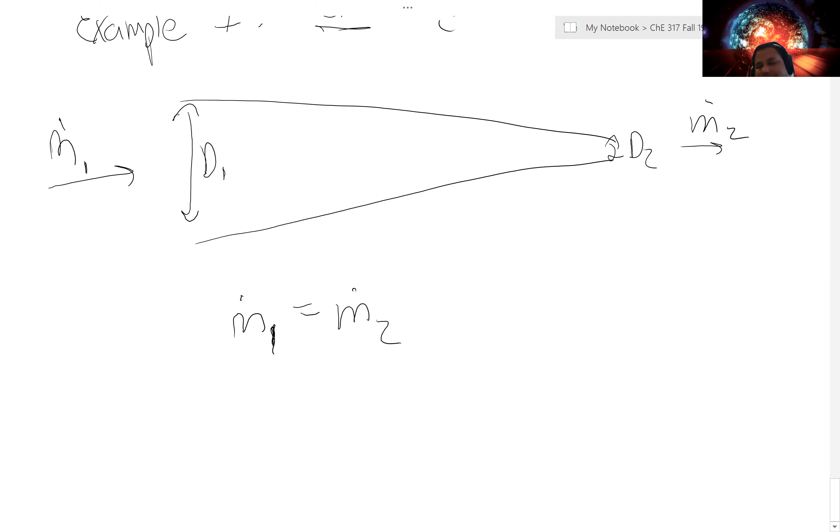So what's going to happen to the flow velocity? Well, I have rho 1, U1, A1 equal to rho 2, U2, A2, where rho is density, U is velocity, and A is cross-sectional area. Keep in mind, for now A means cross-sectional area. Later in the semester it might mean surface area, but we'll cross that bridge when we come to it. It's a problem with engineering - we only have 26 letters in the alphabet and about 4,000 engineering variables to discuss.

So let's start with density. Is density going to change? No. So we're going to assume rho is constant. And when is rho constant? What kind of fluids? Incompressible flow. Now you're speaking my language. So if rho is constant, I don't care about rho anymore - it goes away. Rho 1 equals rho 2, and they both drop out of the equation like a bad habit. Skadoosh. So now I'm left with U1 A1 equal to U2 A2.

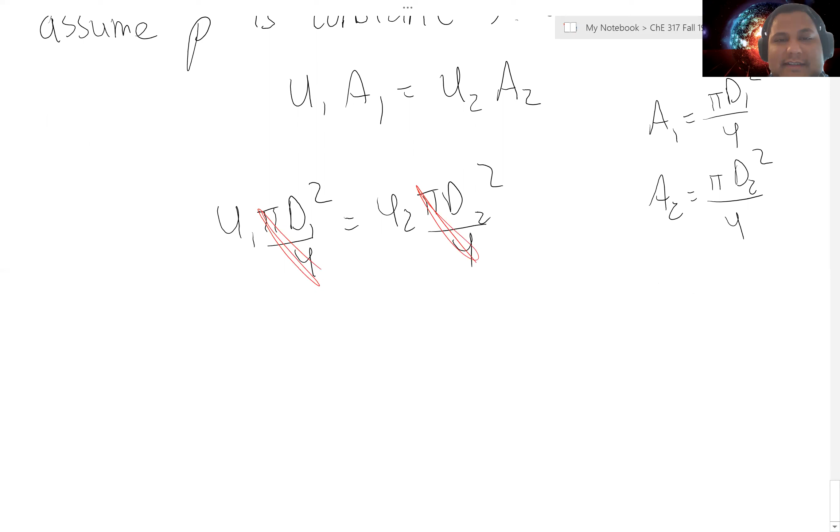And if I wanted to be fancy, I could say A1 equals pi d1 squared over 4, and A2 equals pi d2 squared over 4, assuming I'm flowing through an attempt at a circular pipe. Which means if I plug those in, I have U1 times pi d1 squared over 4 equal to U2 times pi d2 squared over 4. The mathy stuff goes away because we're engineers - we don't want numbers in our calculations, we just want letters. So we're left with U1 times d1 squared equal to U2 times d2 squared.

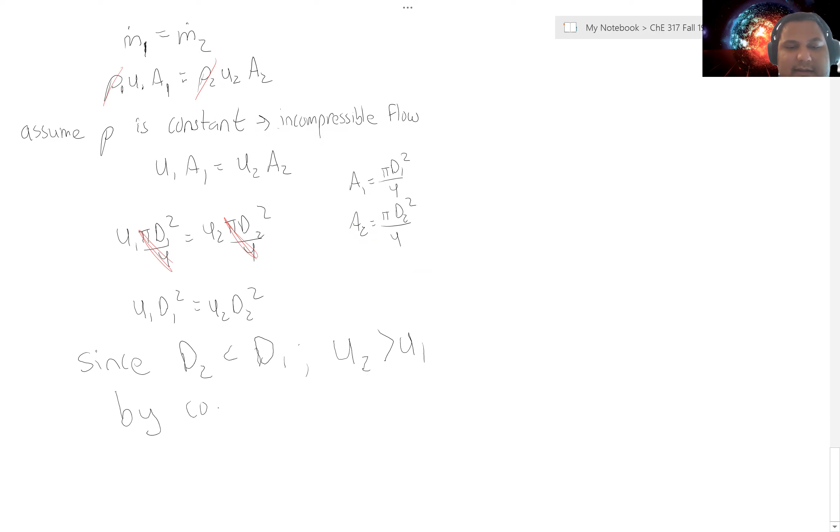So zooming out, what is that going to do for our flow velocity? As I move through that pipe, what is the flow velocity going to do - increase, decrease, or stay the same? It should increase. The flow velocity should increase. So I can say, since D2 is less than D1, U2 is greater than U1 by continuity. Right? So I narrow that flow area, the velocity is going to increase.

A really good example of this - I'm sure we've all done this at some point, playing in the backyard as a kid, before 2020, Pepperidge Farm remembers - you put your finger on the hose. When you put the finger over the hose, the velocity goes way up in terms of the flow.

One more thing I want to leave you with: let's say your civil engineering buddies talked to you before they did their design, and so you chemical engineers fixed it. Now we've got an actual normal pipe that someone would want to buy, where D1 and D2 are the same. But instead of having incompressible flow, I have compressible flow.

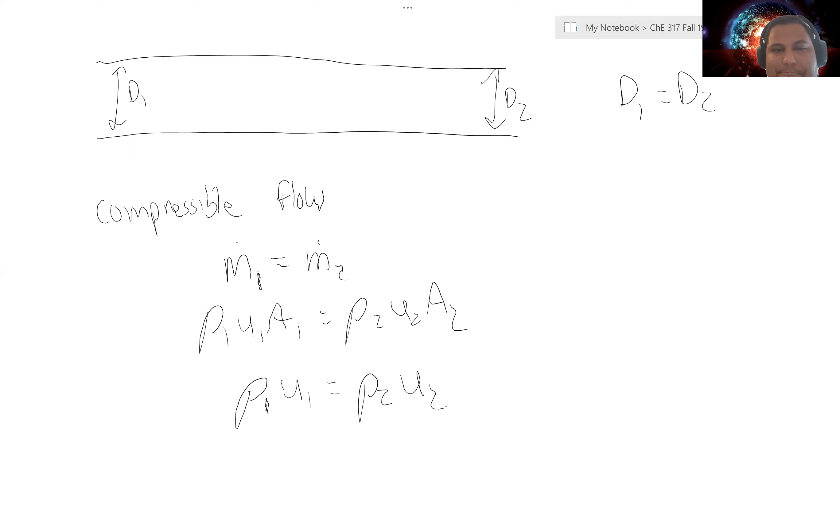I would have the same continuity expression, right? Which means rho 1 U1 A1 equals rho 2 U2 A2, correct? So my areas are going to be the same, so I get rho 1 U1 equals rho 2 U2. So if I'm looking at compressible flow, if I have just a simple pipe with the same cross-sectional area along it, my density and velocity are going to be... related.

But now what happens if I add friction? I'll leave you with this thought - I'm not going to answer it today, I'll answer it on Friday. So now I have big P, P1 and P2. If I have friction, I want you to ask yourself, how does pressure change? And how does it influence the expression we have, rho 1 U1 equal to rho 2 U2?

So tune in next time, and we'll answer that question together.

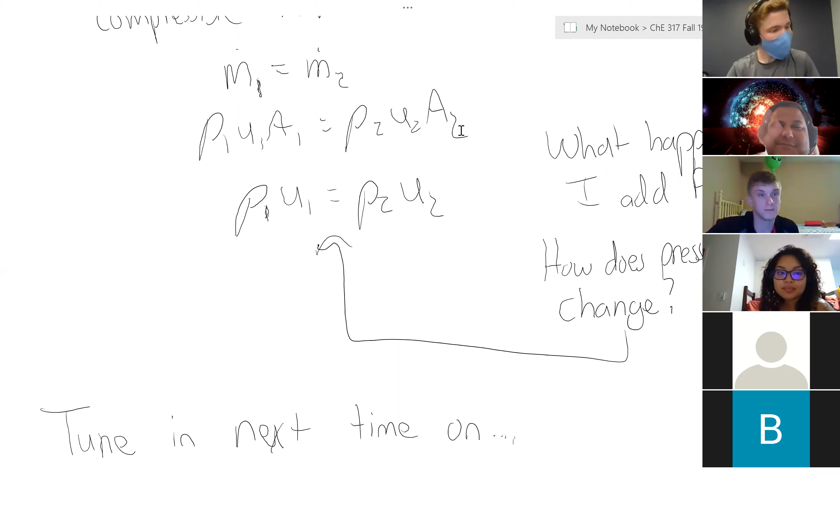All right guys, take care. Have a great day. Have a good day, Dr. Lopez. You too. Take care, Claire.